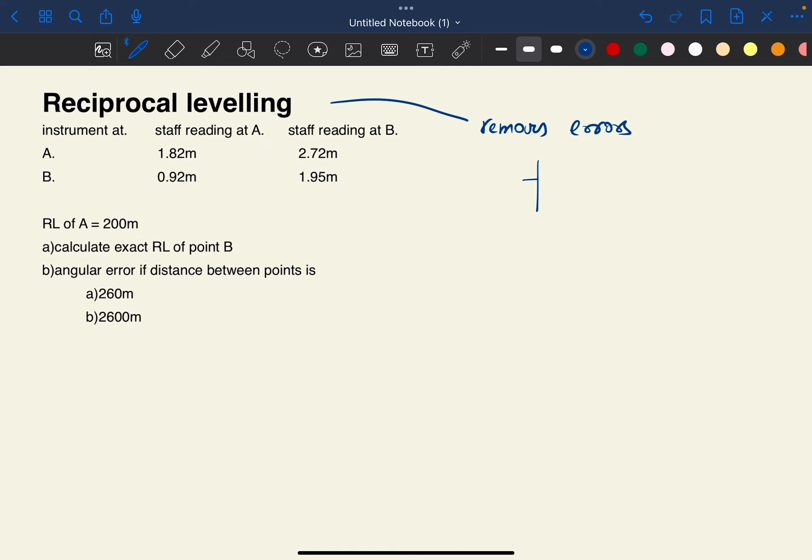Hello everyone, we are going to solve a question on reciprocal leveling. We all know that the benefit of reciprocal leveling is that it removes errors of collimation, curvature of earth, and refraction.

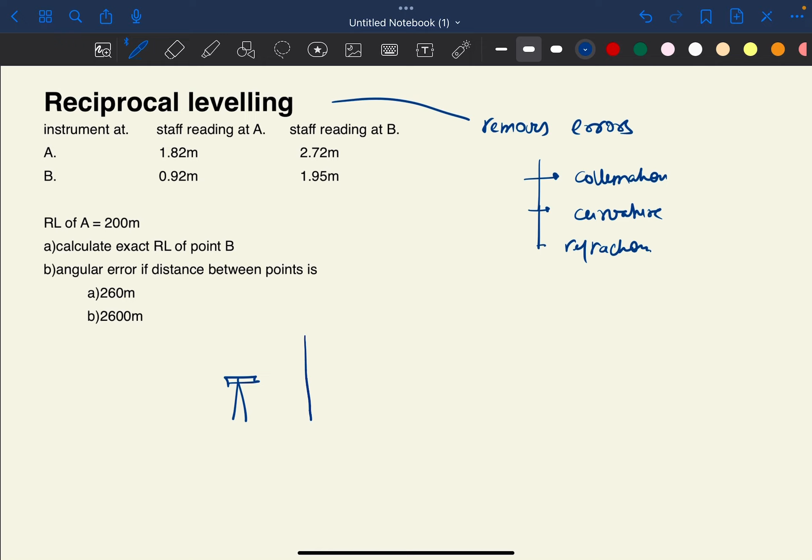So the given data is our instrument is at A, and staff reading at A is like this, and staff reading at B is something like this. This is the ground level, this is our instrument station A, and this is B. I think I've drawn the slope wrong here, it should be like this, because A is going to be at a little higher elevation.

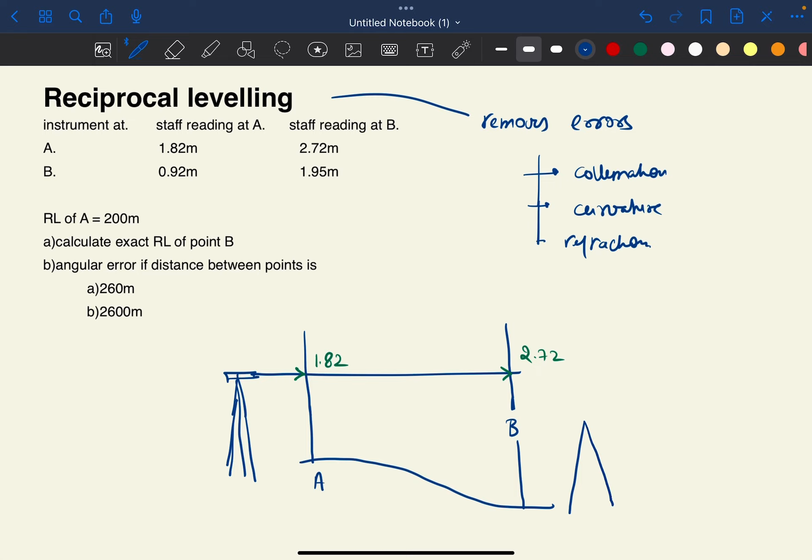So the reading at B is 2.72, whereas if we put our instrument station here, the two readings we will get will be like this: 1.95 and 0.92.

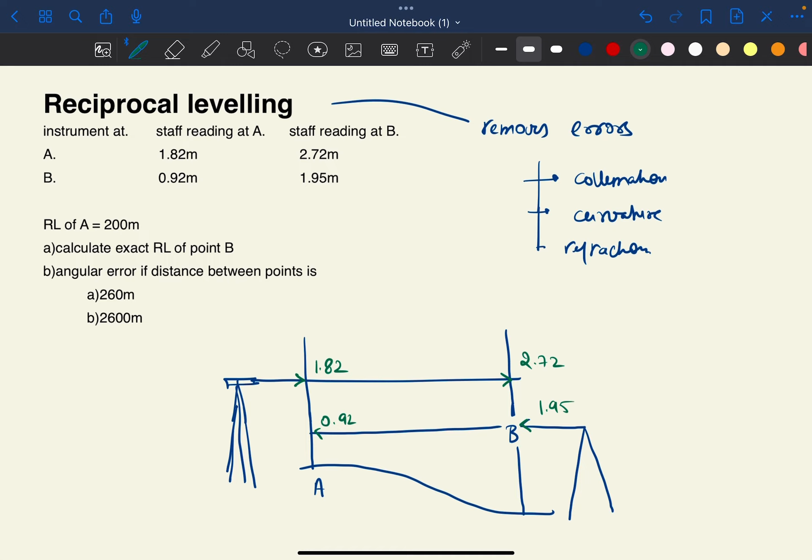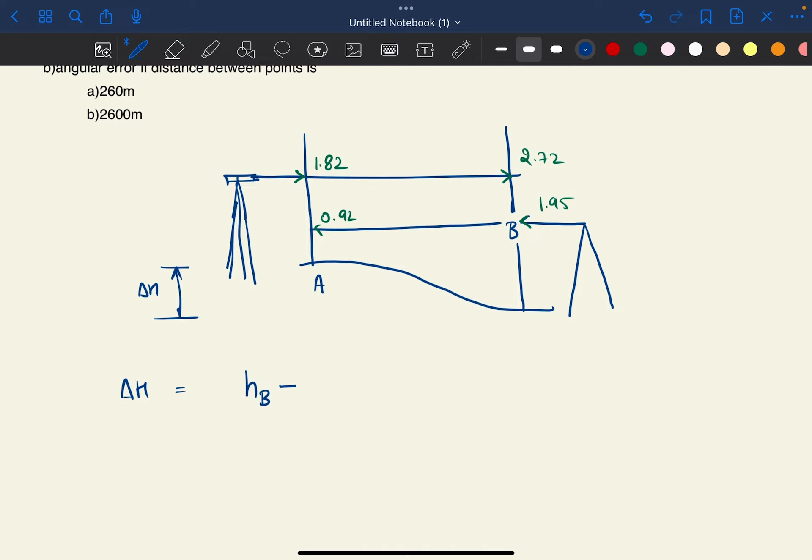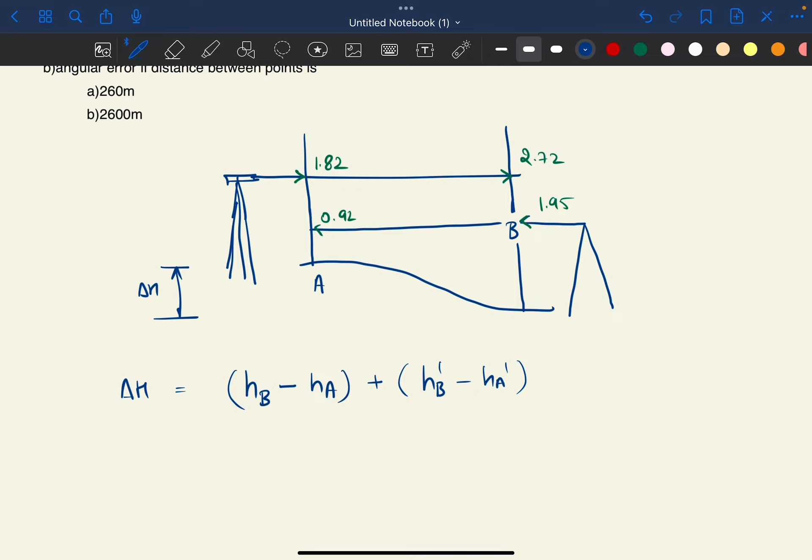We have to find the RL of point B. Delta H, the height difference between the two points, is given by the reading at B minus reading at A when the instrument is at point A, plus reading at B minus reading at A when the instrument is at location B, divided by 2. Substituting these values: 2.72 minus 1.82 plus 1.95 minus 0.92, divided by 2.

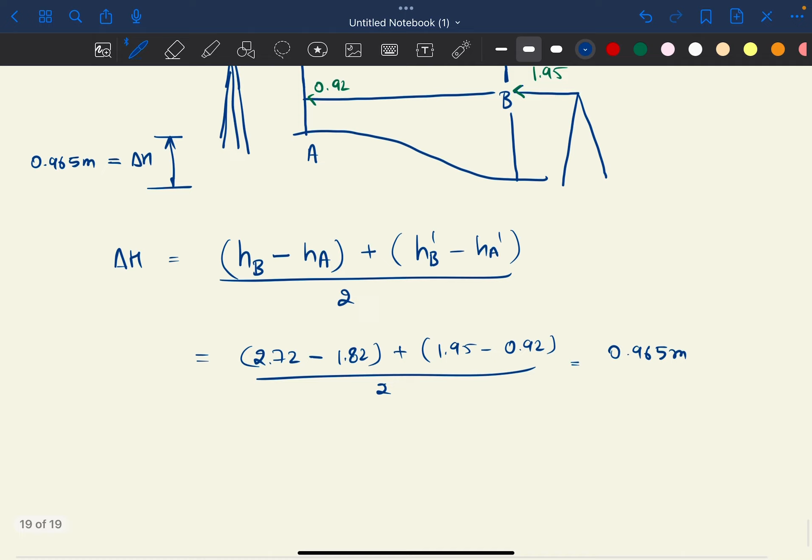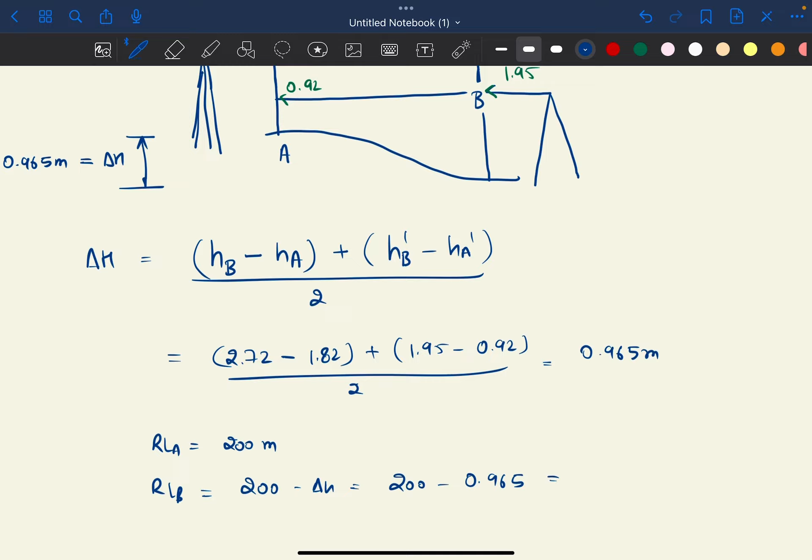So let's find out: 1.93 divided by 2 gives 0.965 meter. So delta H is equal to 0.965 meter. Since we already know the RL of A is 200 meter, RL of B is 200 minus delta H, that is 200 minus 0.965, which is 199.035 meter. So our first solution is 199.035 meter.

The next question is to calculate the angular error if the distance between the points is 260 meter. Since 260 meter is a very small distance, we can neglect the errors due to refraction and curvature of earth.

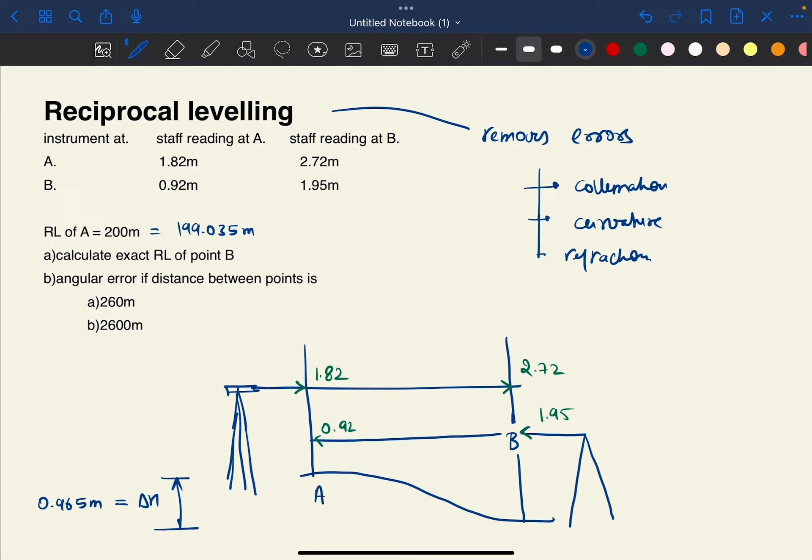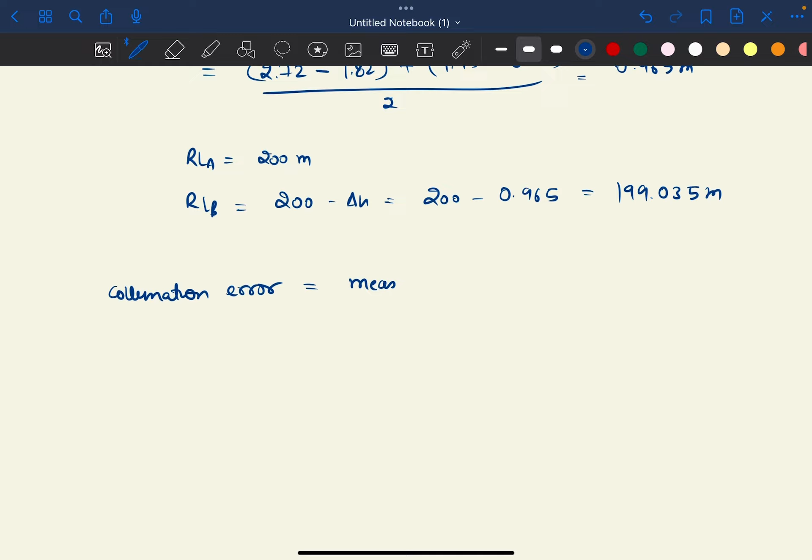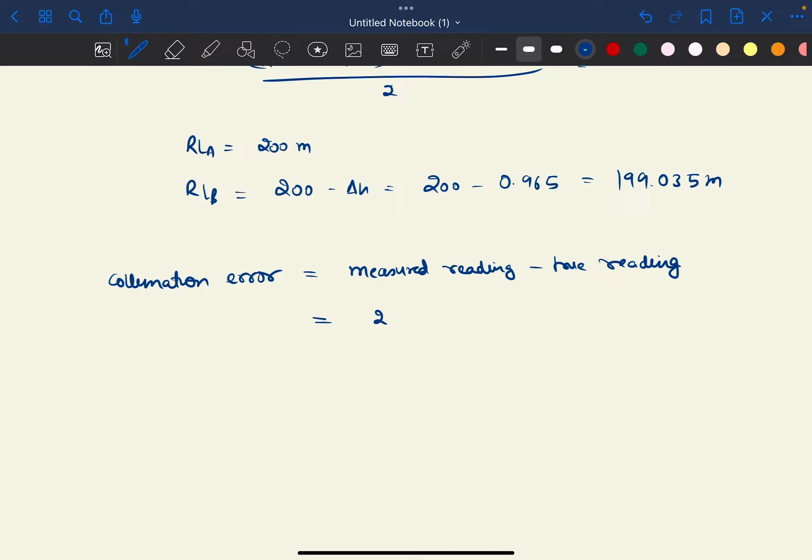So this is collimation error. Collimation error is going to be equal to the measured reading minus true reading. The measured reading when the instrument station is at A and the staff is located at B is 2.72 meter, minus the true reading which should have been 1.82 plus 0.965.

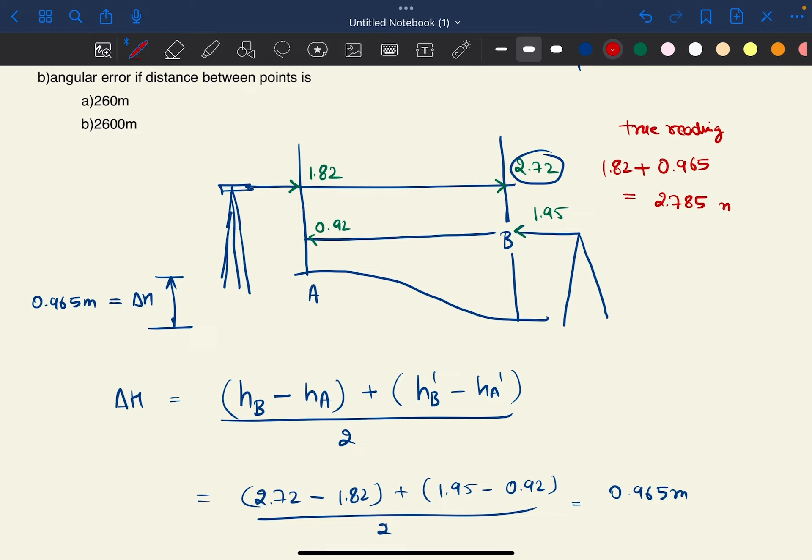Adding these values gives 2.785 meter, this is the true reading. So our angular error, that is collimation error, is coming to negative 0.065 meter. What does this negative value suggest?

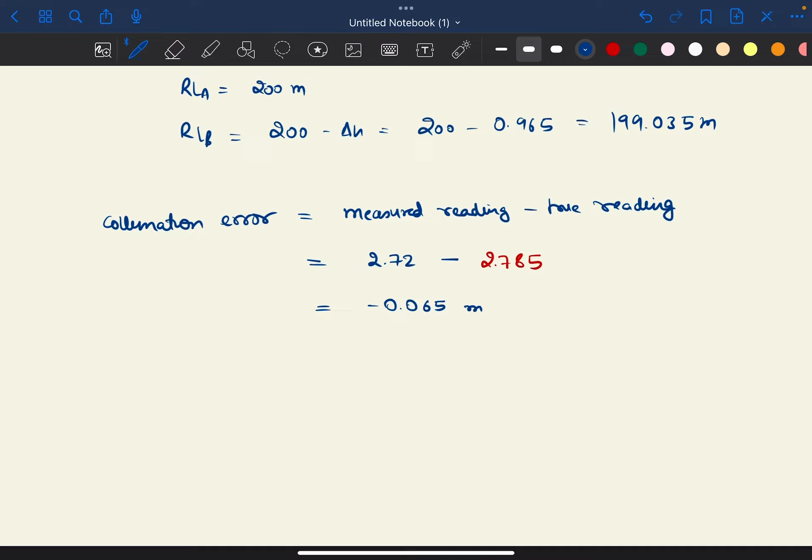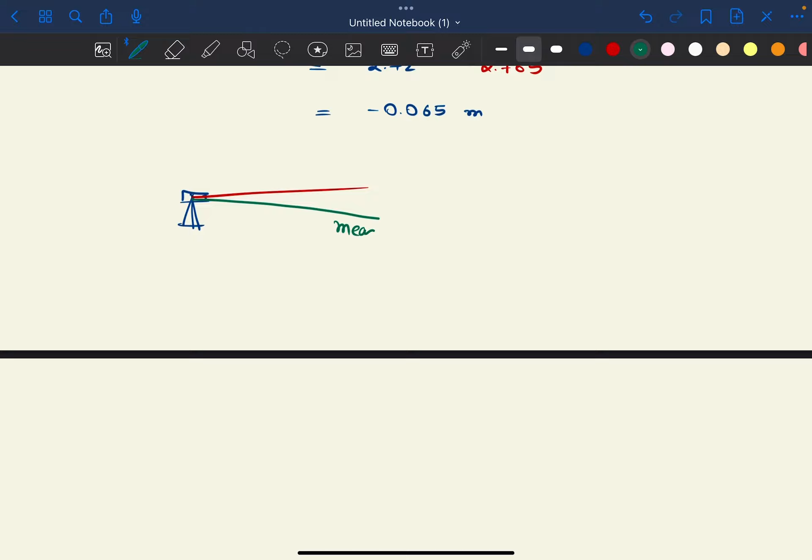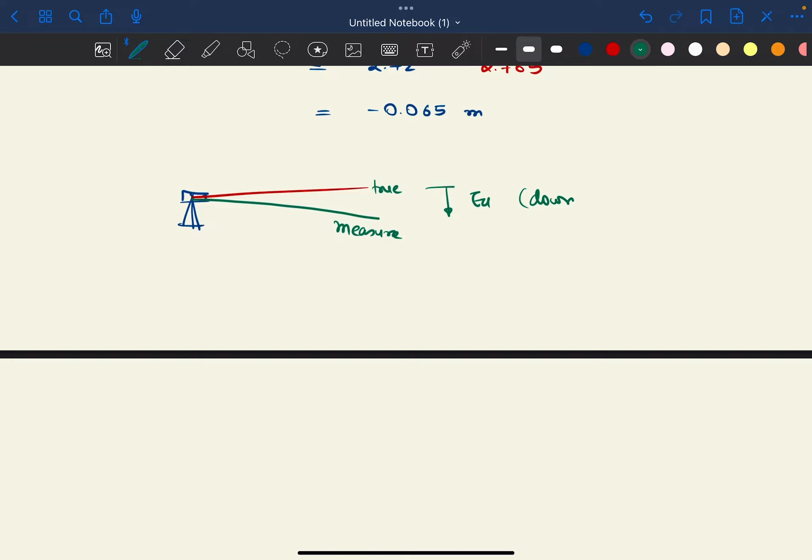This negative value suggests that the error is negative and the correction required is going to be positive. It suggests something like this: say this is our instrument, the bubble is at center, then our line which should have been straight, but it's not, it's shifted a little downwards. So this is the measured value, and this is the true value that should have been there. So error is negative, downward shifting of line of sight.

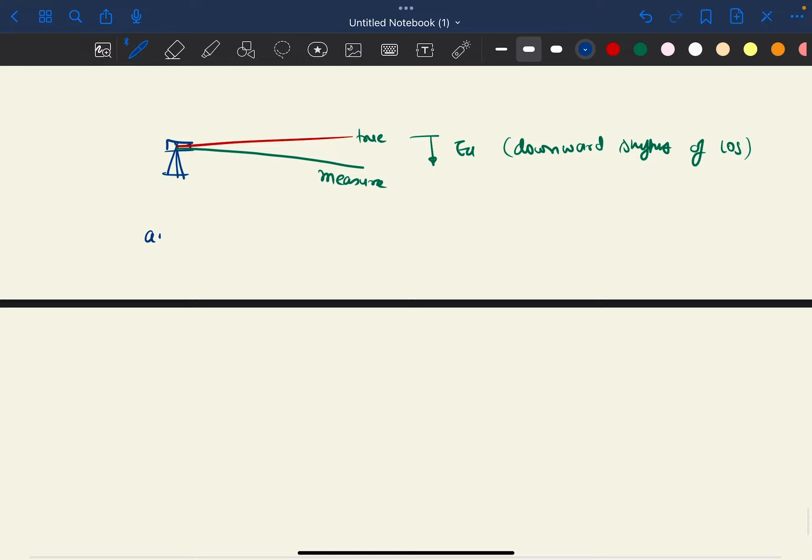So this is collimation error, but what we had to calculate was the angular error. Angular error is equal to error due to collimation divided by distance, taking the mod value. So 0.065 divided by distance, which is 260 meter. This gives tan theta around 2.5 into 10 raised to power minus 4.

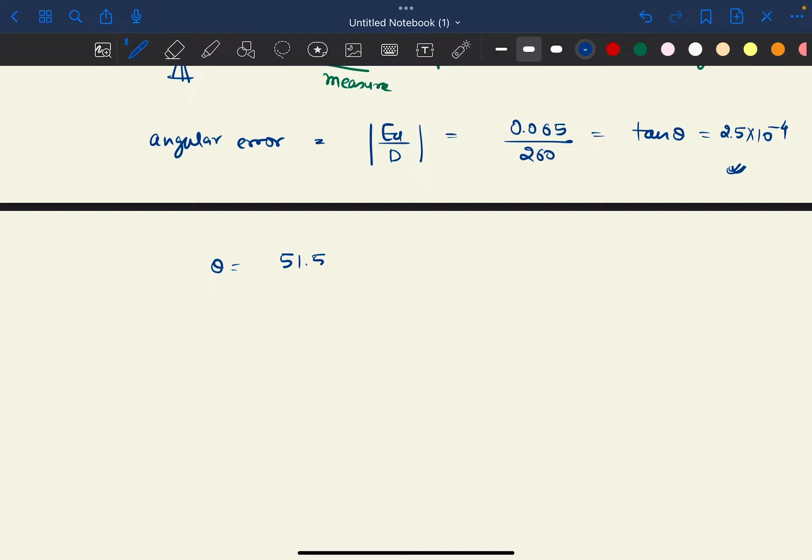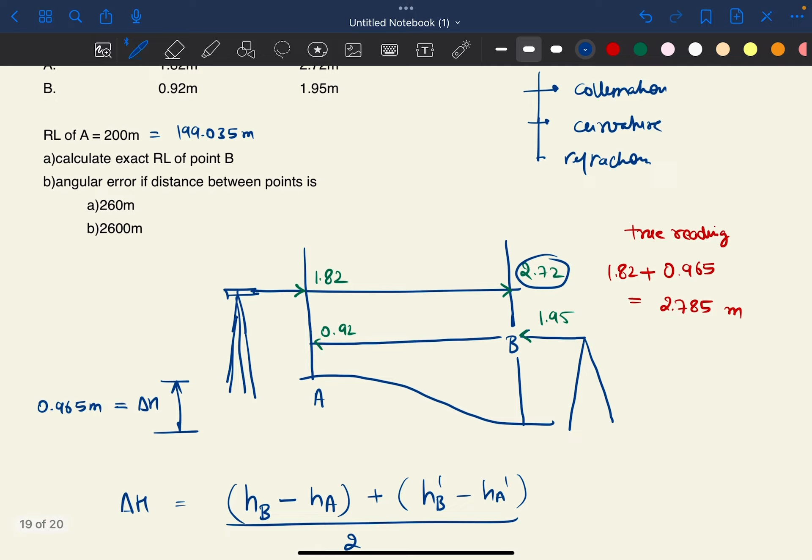So theta is going to be equal to, well this is the answer we require, but if in case theta is required, we can also calculate its value. Theta comes to 51.57 seconds. So this is our first answer of angular error, this is the angle of error, the angular error.

Now we calculate the second part, in which the distance is 2600 meter. In this case, error due to curvature plus error due to refraction plus error due to collimation is going to be equal to minus 0.065 meter. Error due to curvature is positive, plus 0.0785 d squared.

Refraction error is negative 0.0112 d squared, plus error due to collimation is equal to minus 0.065 meter. Let's substitute the value of d here in kilometers: 2.6 squared minus 0.0112 times 2.6 squared plus error due to collimation equals minus 0.065. So let's calculate.

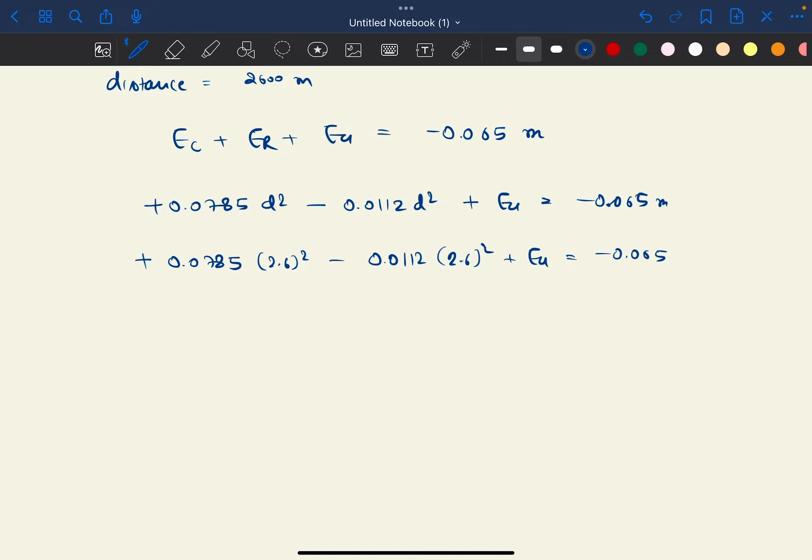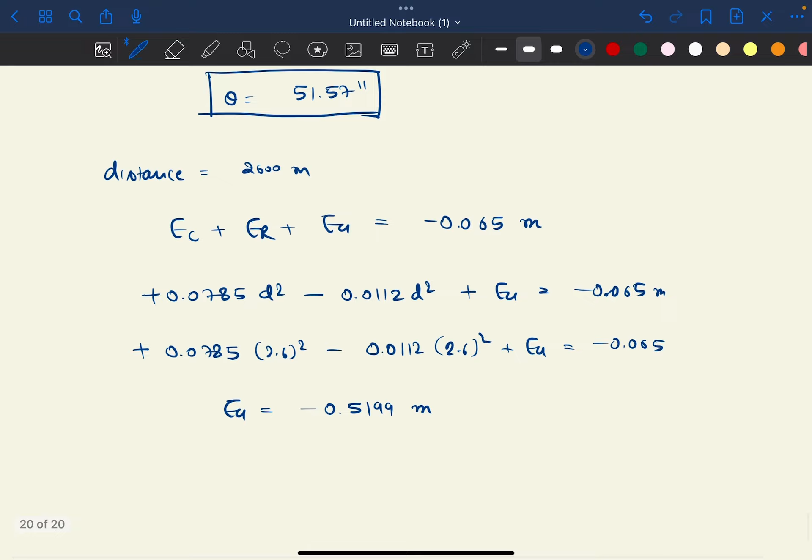Error due to collimation is coming around minus 0.5199 meter. Let me see it once again. The error was 0.065 meter. Yeah, it's coming negative only, the angular error.

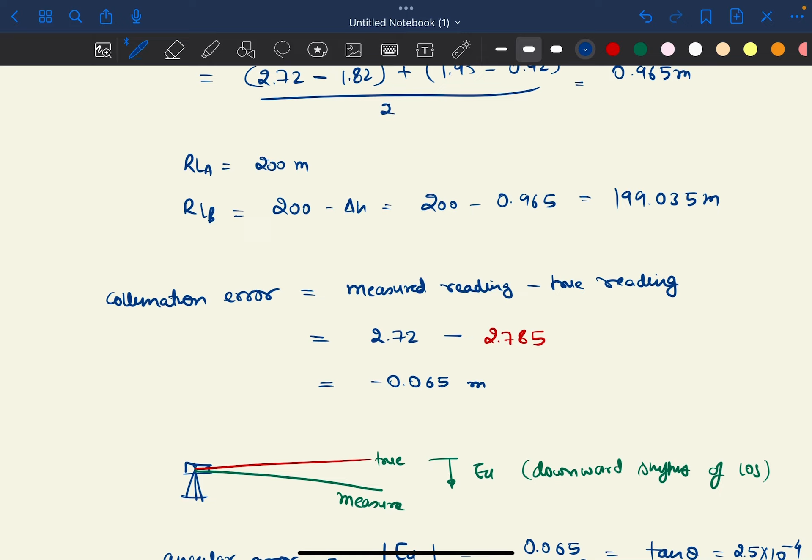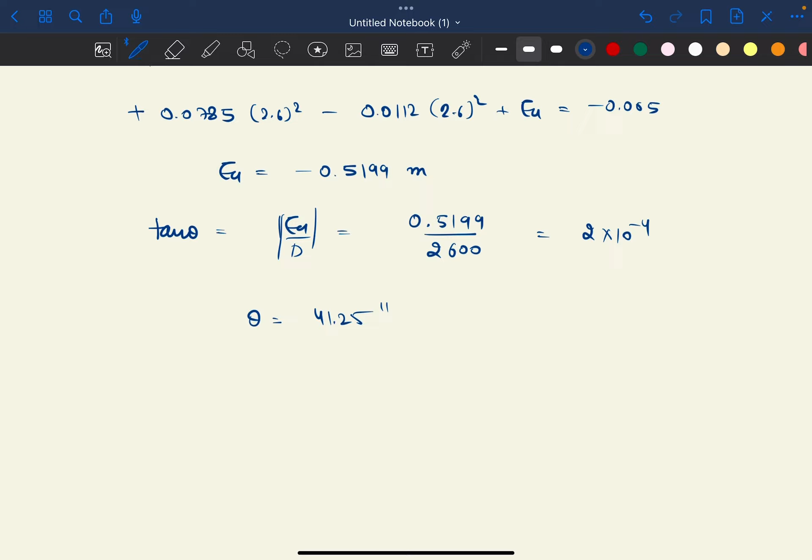So tan theta will be equal to E collimation mod divided by d distance, that is 0.5199 divided by 2600. We'll get some value around 2 into 10 raised to power minus 4, so theta will come around 41.25 seconds. Here also the value is negative, meaning the line of sight is shifted downwards.

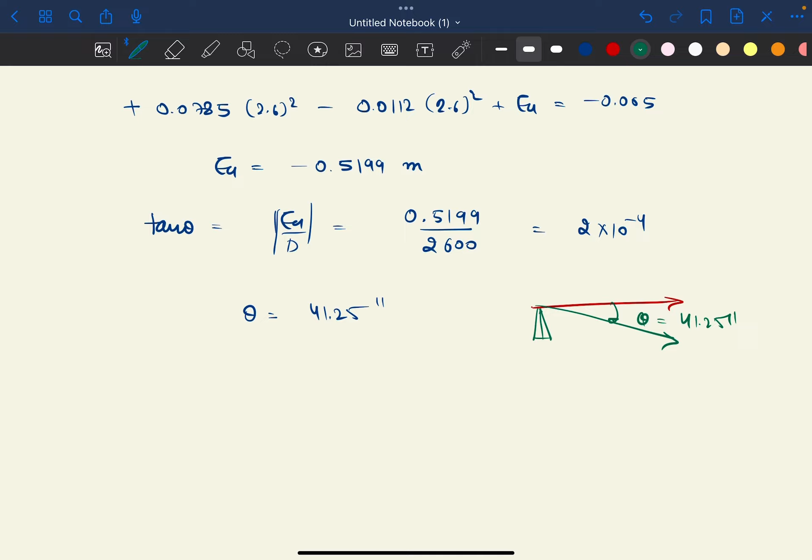So it is something like this, the horizontal line but the arc is shifted. So this theta collimation, the angular error, is 41.25 seconds. Thank you for watching my video.